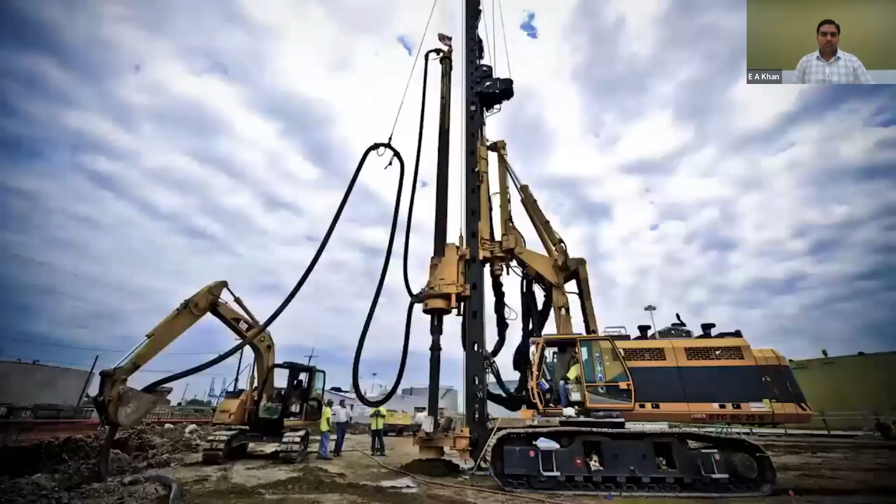Something about the soil—it was geotechnical. With the engineering, I felt like I could actually touch the soil. And then after I got into a lab and got to go out on drill rigs, it was so much based on experience and what you have seen and how that soil behaves. It's not going to be the same every single time, so there's always a challenge with it.

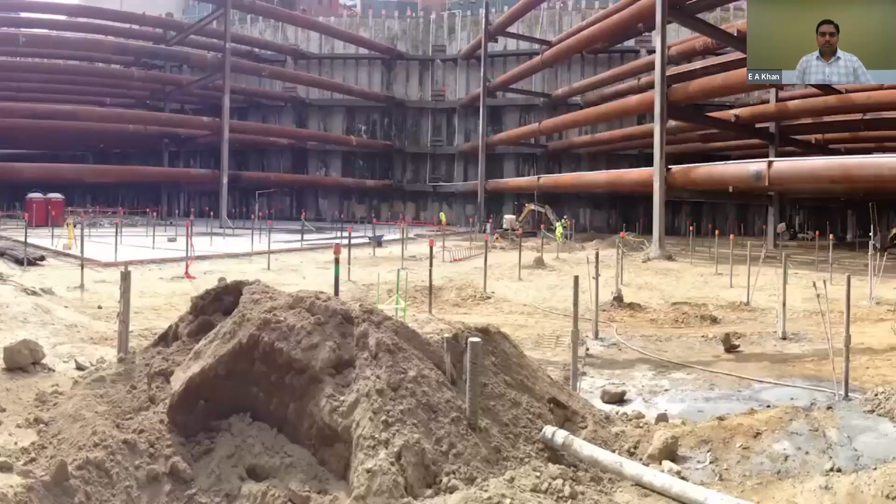It's a great industry for people who like new things that pop up underground and who can deal with changes as they happen. So it's rewarding and always full of new things.

We definitely get the opportunity to be designer and builder all in one, and not everybody has that offering. Not every engineer has that ability in the pathways that they choose.

It's very satisfying. Most of the work we do is never seen, but it's still satisfying to drive over a bridge knowing I've had a hand in constructing it, or looking at a high-rise building, any beautiful building, knowing that deep below the ground is my contribution to that structure. It's just a very satisfying feeling.

It's a very big industry, so you have a great opportunity to advance and move forward in your career and become valuable to the industry or the company you're working for.

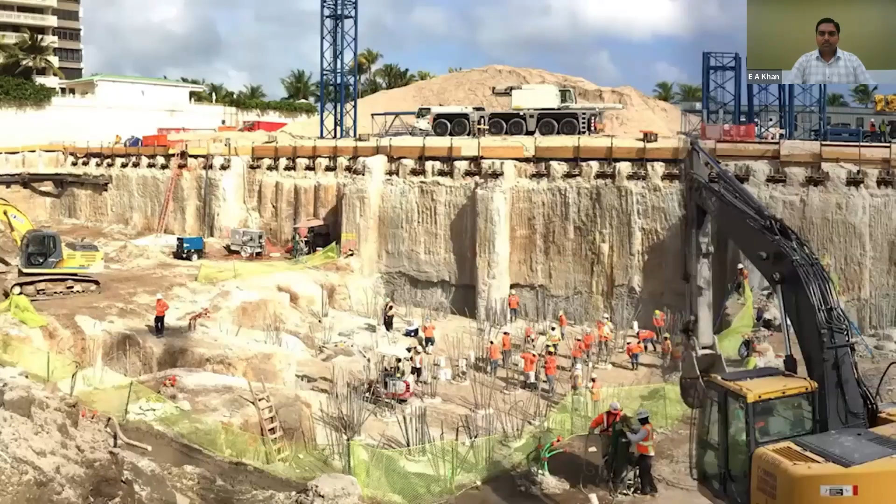What I like about soil is that it's sort of a mystery below the ground, right? You only get to see a little bit of it at a time and then try to interpret what's going on. So it's sort of a puzzle that you're putting together.

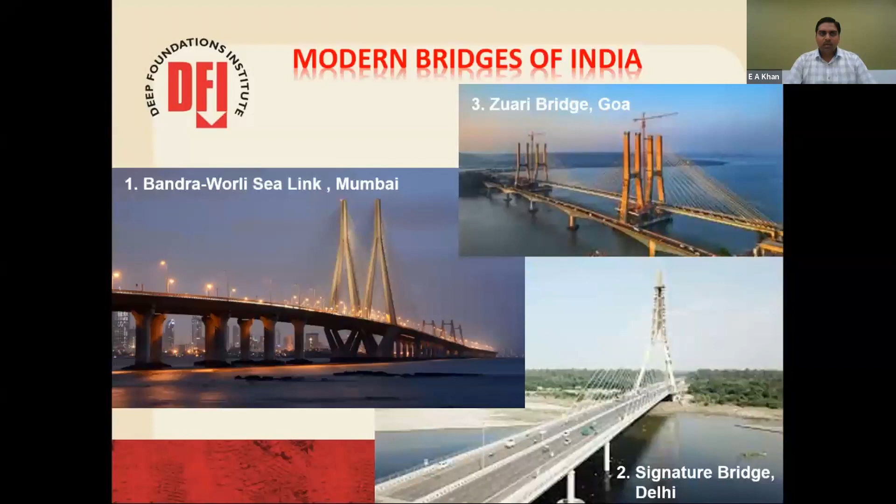What you are seeing on the screen are a few modern iconic bridges built in India in the last decade, be it the Bandra-Worli Sea Link in Mumbai, the Signature Bridge at Delhi, the Zuari Bridge at Goa, the Bogibeel Bridge at Assam, the third Narmada Bridge at Bharuch, and the second Hooghly Bridge at Vidyasagar Setu.

I'm sure you must be wondering how all these tall pylon, cable, and superstructures have been built. But have you ever thought about the structures hidden beneath, how they were built? And what if you are asked to construct one of such structures, what will be your strategy?

In this session, we'll try to understand how concepts are worked out to solve these kinds of real-time challenging problems with the help of two case studies: the Signature Bridge at Delhi, and the third Narmada Bridge at Bharuch.

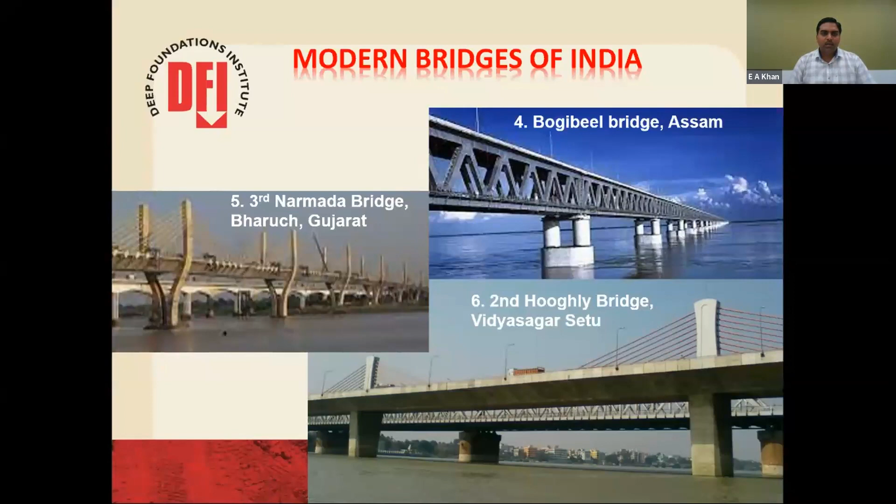So the case study will have a brief of what is the project, what is the substructure, the foundation, the superstructure, and what are the ground conditions. Then we'll try to understand how the site is spread out, what is the site layout, and what are the challenges there. We'll work out some options possible to solve that problem, and finally how that solution is applied at site, and what conclusion we can make out of it.

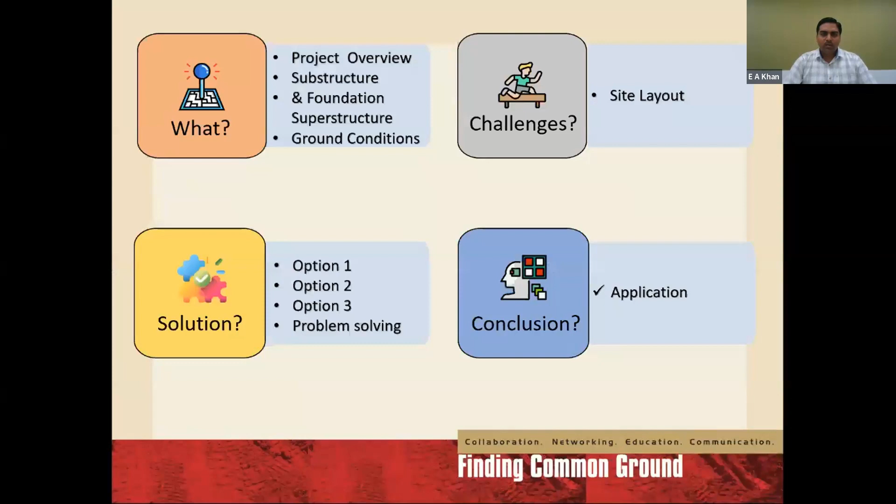There could be different possibilities of these foundations depending upon the contract conditions or environmental regulations. You need to maintain certain foundation levels, and there could be different possible situations.

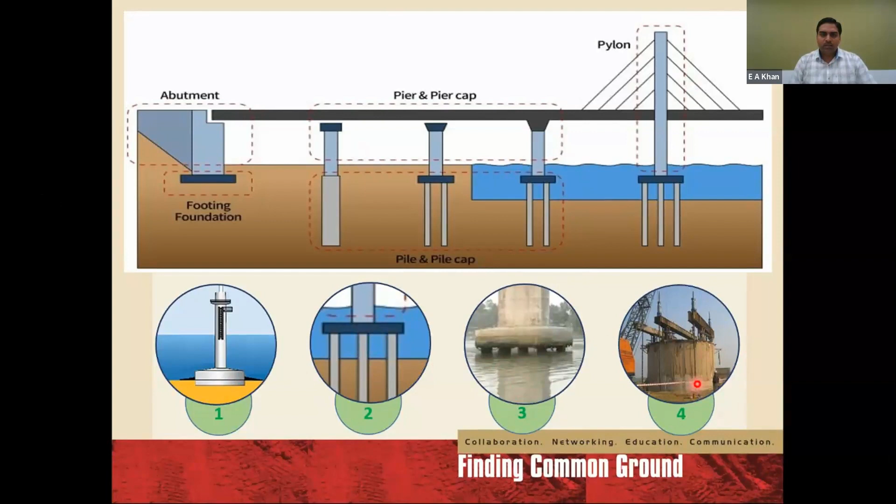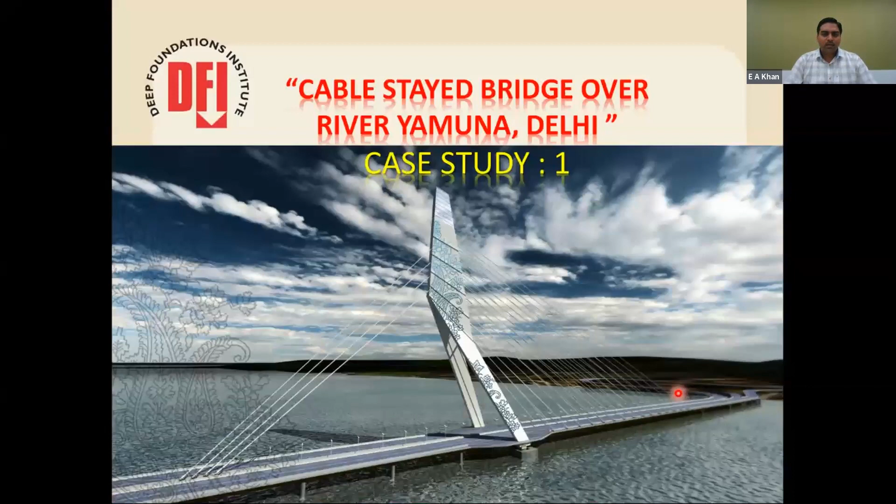Let us start with our first case, the cable stayed bridge over River Yamuna, the Signature Bridge, the iconic bridge most of you might be aware of. It is situated in Delhi, Wazirabad, 600 meters downstream of the existing barrage.

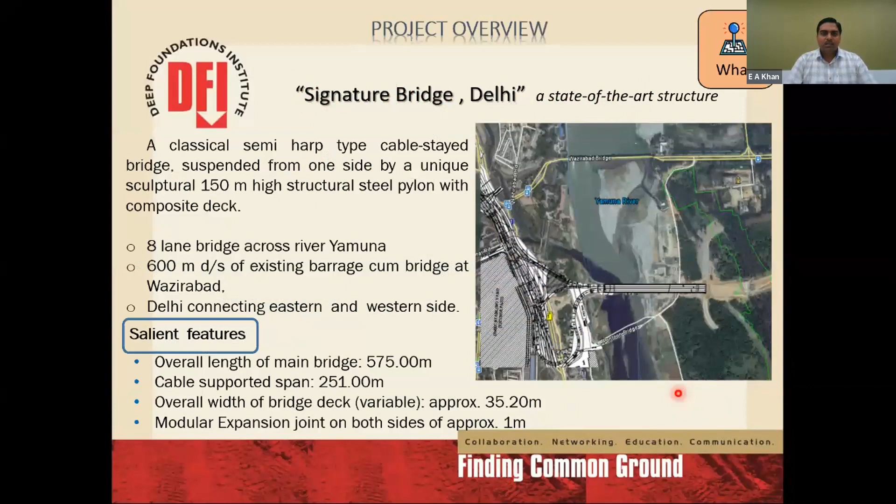The main bridge length is 575 meters, and the main cable stayed portion is 251 meters. The overall deck width is about 35.2 meters, and it has got one of the largest expansion joints, around 1 meter. The most state-of-the-art structure is the pylon, which is about 150 meters tall.

Let's see the superstructure. It consists of the deck, the riding surface, which has main girders and cross girders. It is held up by the cables, stay cables, supporting the main spans.

The load is taken up by the two legs of the pylon, in structural steel weighing around 7,500 metric tons. The entire load of this main span is balanced by the balancing backstay cables, which transfer the load further to the foundations, where we have a special rocker bearing allowing the movement of the bridge of that 1 meter I mentioned.

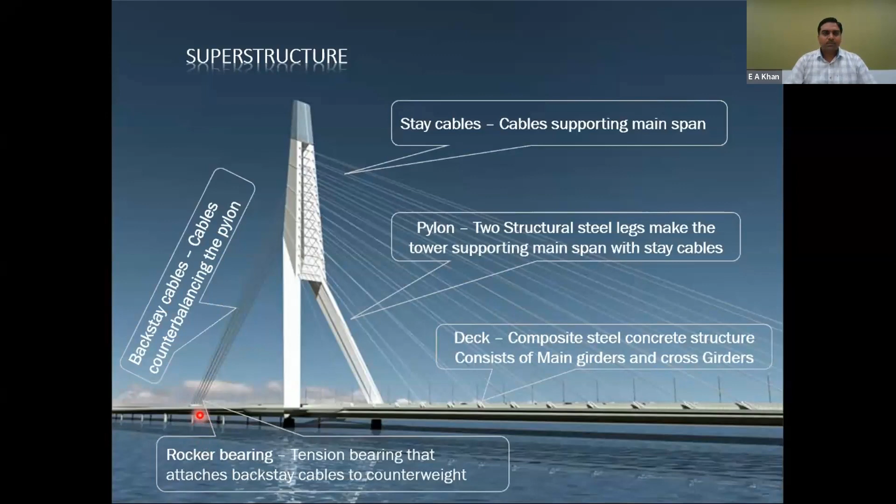Now, this project is a classic example of how every foundation in a project is unique. If you see the strata, from P1 to P26, the rock strata is varying - it goes up and then further goes down. So depending upon the loads which it has to carry, since this is the main span, the loads are heavy.

If you see from P1, there is a well foundation, then again an open raft. Then for the main pylon foundations, there are two separate foundations. And then again for the balancing spans, one raft foundation and then a well foundation.

And for the backstay, you have again a big, large diameter, 17-meter diameter well, which is a hybrid kind of foundation, which has got pile as well in it. The main P3, P19, and P20, these are the foundations which are critical, which are lying in the water.

Which are always subjected to floods. So the main pylon foundation is 23 meters in diameter, and it is about 20 meters resting on the rock below the soil. And the other adjoining balancing spans are P3 and P20 foundations, which are about 7 meters diameter and having a pier diameter of 2 meters.

And in the extreme left of the image, you can see some structure C32, which is the approaches. And you'll be surprised, beyond C32, there are pile foundations. So within a location of around 600 meters, you have all types of foundations. That is the challenge that civil engineers have to face.

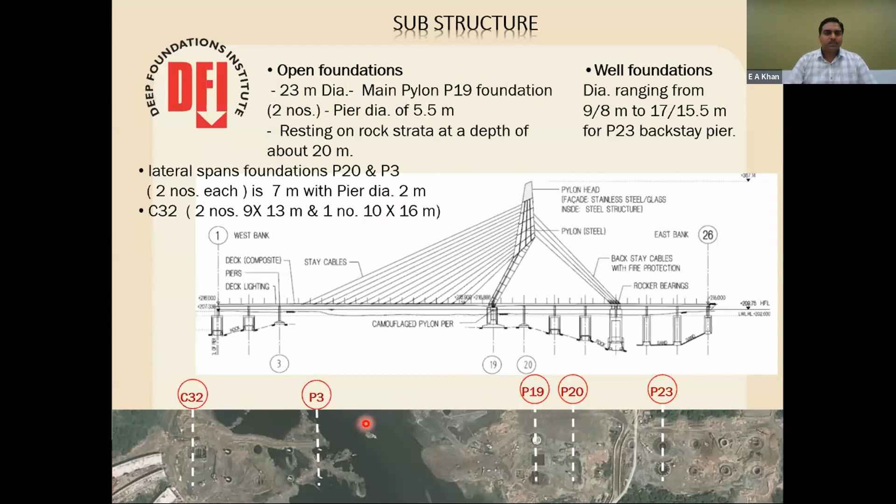Let us see the ground conditions. Here, mainly the subsoil strata is generally homogeneous and comprises of mainly two types of layers.

The low water level during summer season is around 202, and the high flood level is around 209, which is used in the permanent design. And then the observed ground level on the right-hand side from P19 to P26 is around 206, which is high ground, and P3 to P1 is around 203 meters.

The first layer is of sand, which is about up to 194 RL. And then you have sandy silt up to 190. And below that, you have a typical of a Delhi soil, which is a moderately strong quartzite rock.

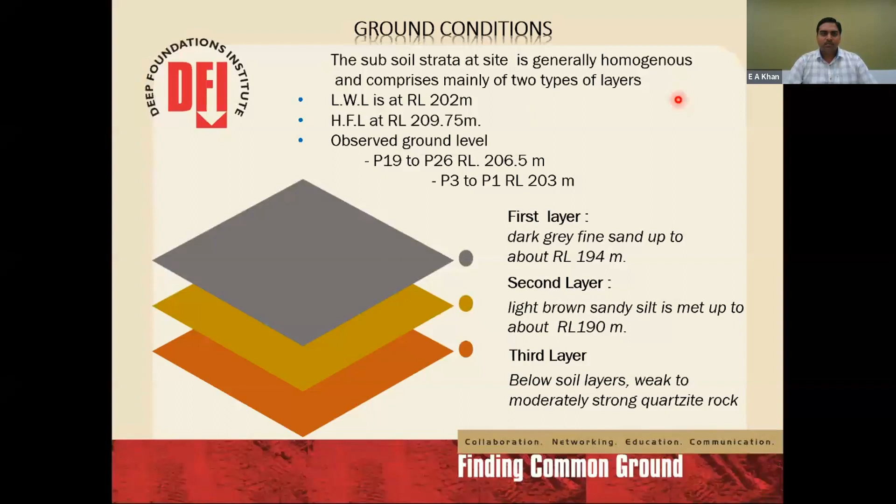So the challenge is to construct the foundations P19, 20, and P3, which are open raft to be founded on rock mid of the river. So we need an efficient ELS system.

There are certain requirements of every ELS system. In this particular case, it needs to be a simple and economical solution. It should facilitate a stable excavation with minimal obstruction to the foundations. It should provide an efficient groundwater cutoff. It should contain the ground movement within the permissible limits, and it should be easily dismantleable.

The real challenge is here, if you use any system, it has to rest on rock. So installation in hard rock is a challenge.

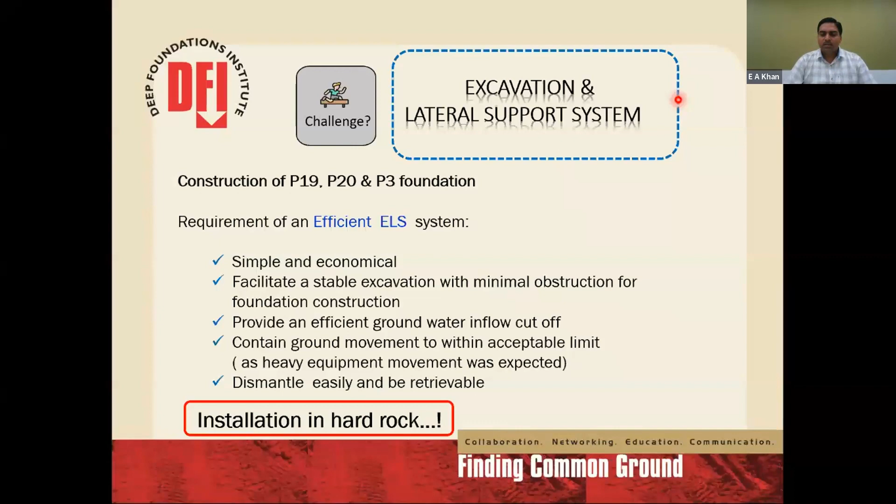What are the options possible? What are the solutions possible? The easiest solution is always to have an open excavation. This is the most economical way to build a permanent open foundation.

But there are certain limitations. If you see the area is very near to the edge of the river, so always there is a risk of flooding. And since the size of foundation is huge, it is around 23 meters in diameter. So if you excavate the entire area, it's a huge excavation.

And doing such excavation in an ecologically sensitive area is restricted. And when you do such excavation, a continuous dewatering and backfill expertise is required after the construction is complete.

And once you are doing open excavation, you need to stabilize the slope. So you may need a larger area. So that right of way also is an issue.

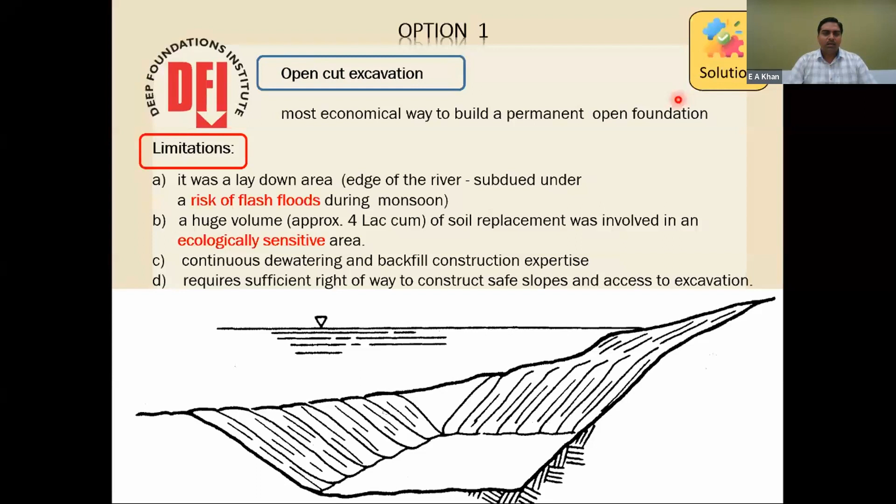So what is the other option possible? Maybe an excavation and lateral support system would be a better solution here. So cofferdam with sheet pile will have certain advantages, like it will allow excavation and construction of structure in otherwise very poor environment. It may provide a safe working environment.

And then if you are using sheet piles or any other similar structure, it may be easy to install and remove later on, so that the material can be reused in other projects.

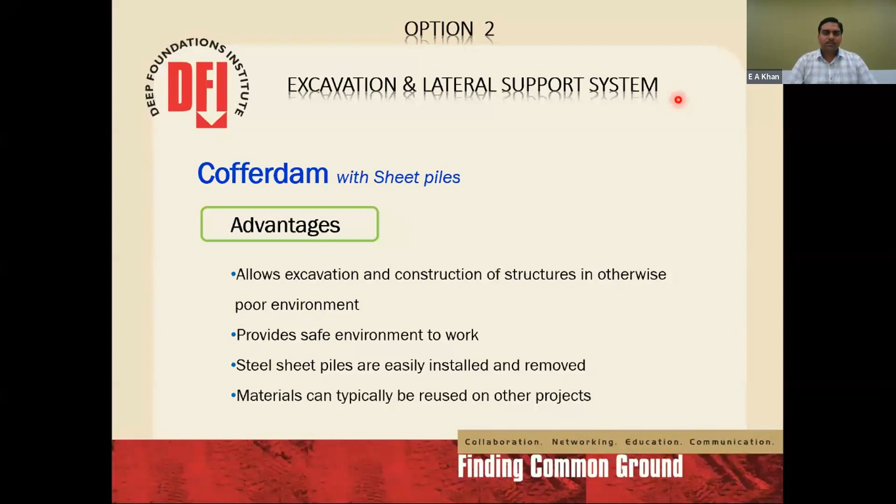Now, if we have decided that we'll use the structural steel sheet pile cofferdam, then there are always different sizes and shapes possible. So which is the best shape which we should adopt?

The first option is to have a rectangular cofferdam. So the issue with this is if you do a combined rectangular cofferdam of such a huge size, any problem anywhere in the structure will lead to stoppage of the work. Just imagine if it gets flooded, the entire operations will be stopped.

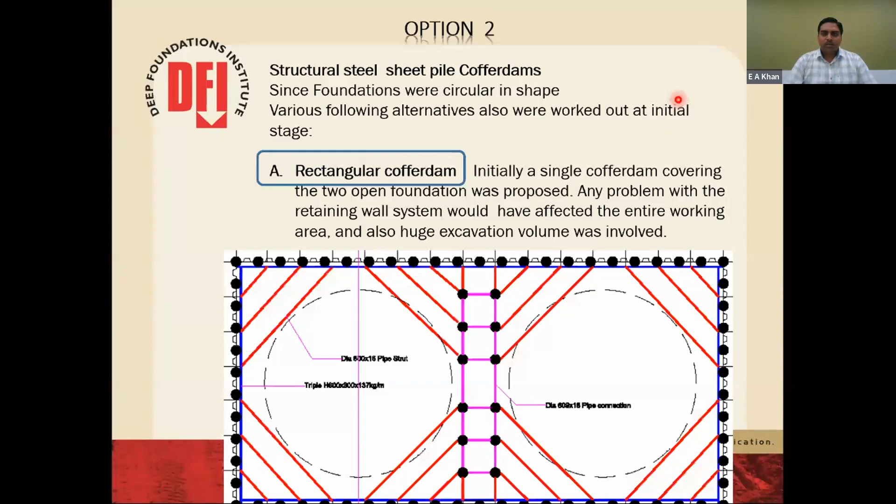Okay, so now the other options remain as octagonal cofferdam and circular cofferdam. Here in octagonal cofferdam, you get good structural optimization, where you'll get reduced quantities of sheet piles as well as reduced quantities of walers also. And the further better option is having a circular cofferdam.

But the radius required here is 12 meters, which is very challenging to achieve at site actually. You need a skilled team so that they can achieve perfect shape. Otherwise, the behavior which you have assumed in the analysis may not be the actual at site. So you may have problems later on. Although the circular cofferdam is the best economical solution in terms of quantities.

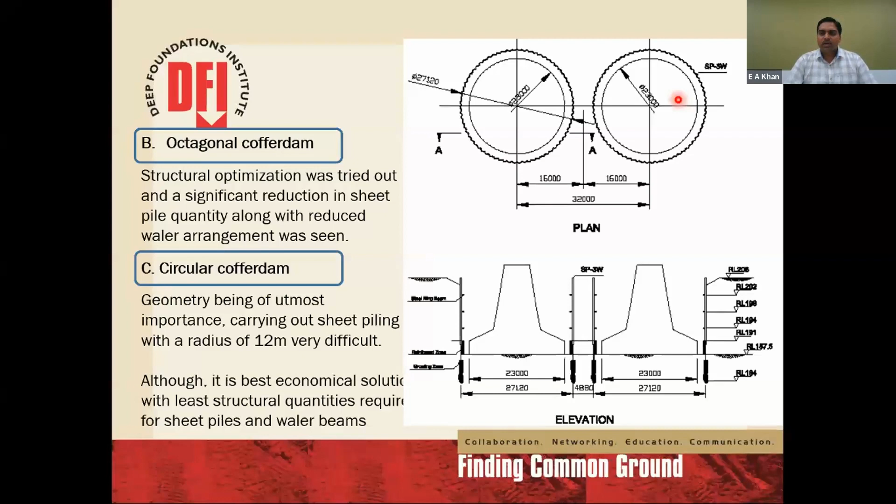So a techno-commercial review was done. And finally, it was decided that for P19 foundations, a 28 meter by 28 meter, 2 isolated open foundations will be done. And at P3 and P20, we'll have 12 meter size rectangular cofferdams.

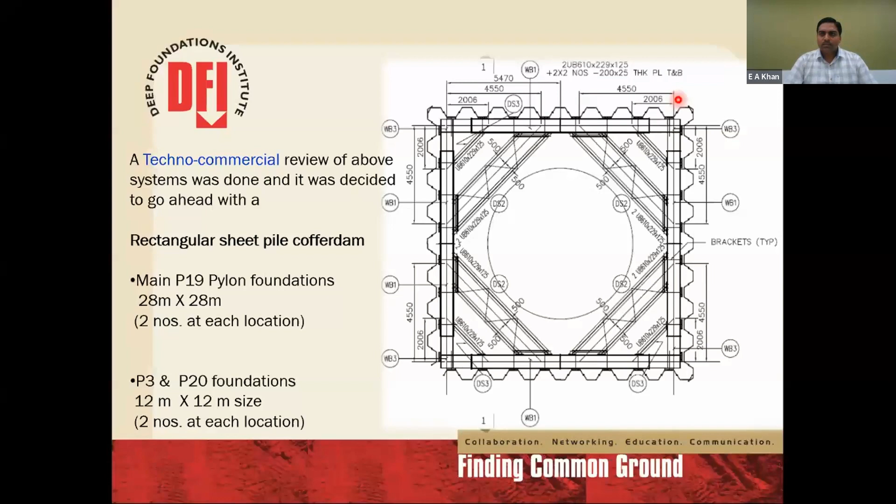Ideally, a sheet pile or any retention system should have good embedment in the soil or rock. But when dealing with rock, it is very difficult to penetrate the sheet pile. So insufficient embedment depth was a challenge here.

When you install the sheet pile and excavate layer by layer, strut by strut, by the time you reach the bottom to install the last strut level, there is a significant unsupported height. This creates a risk of base shear leading to instability, as there is no passive resistance available.

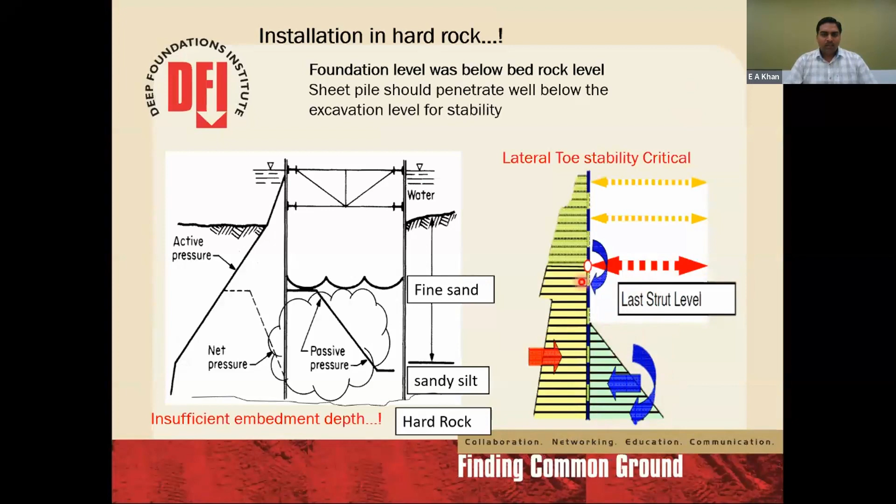We had to find a solution for this, which was the innovative idea of using a toe pin. A toe pin is a pre-drilled pile driven initially along with the sheet piles, on the face where reaction resistance needs to be generated. It's a 273 mm diameter steel casing drilled at the top, into which an ISMB 200 section, or any equivalent section sufficient to take the reaction, is lowered, and then concreting is done.

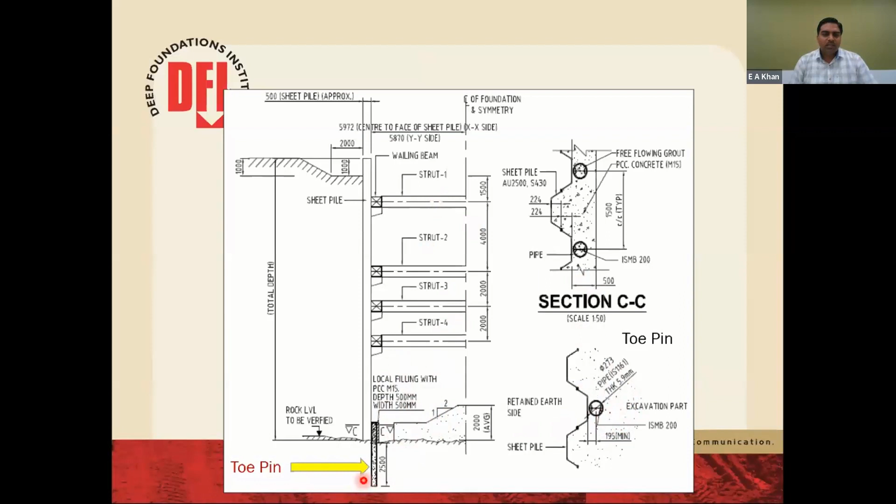So when you excavate layer by layer and reach this level, even though you need to excavate a greater depth, you have safe resistance available to carry out the works.

While designing such a cofferdam, certain considerations must be taken care of. A good understanding of the subsoil conditions is very important, as are the parameters used in the analysis. Otherwise you may not get the right picture, and may get forces which are not in line with actual observed forces.

Understanding the stage-wise excavation is again very important - what are the different steps, what forces will be generated, what are the unsupported conditions. All of this needs to be properly idealized.

Stability calculations against overturning must be done, and if there are chances of scouring, that must be taken care of. Especially when founding on rock, stability against horizontal shear at the tip is very important - you must check whether the system is stable and properly socketed in rock.

Besides active, earth, and passive pressures, there are other forces like ice, wave, and water current to consider. Equipment used for excavation moving around the structure may lead to additional surcharge due to heavy machinery, and heaving of material when the excavator works just beside the sheet pile or other retention system. This must all be taken care of.

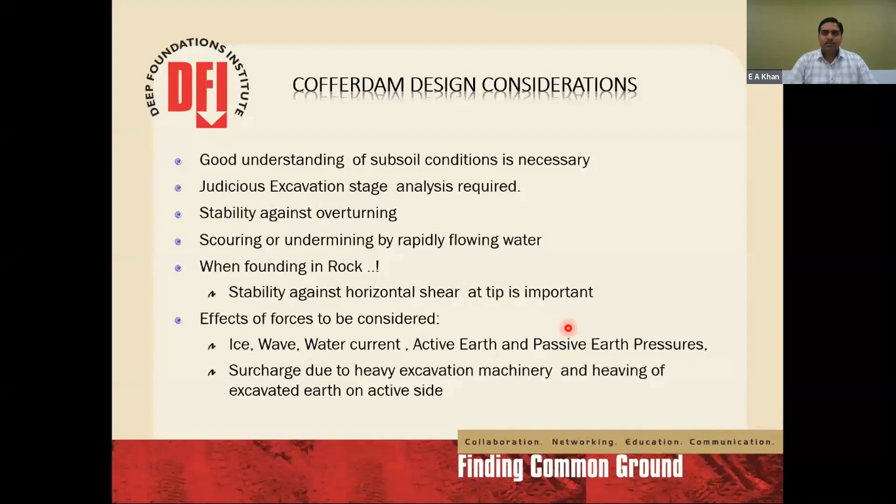Once you have designed, analyzed, and finalized the section, it is very important to communicate the construction stages and process to the construction team, so they carry out construction in the desired way and the behavior and performance of the system matches the design requirements. This is how you put the stages on the drawing board.

The first stage is clearing the area and leveling the ground. Then you drive the sheet piles, and pre-drill the toe pins before starting excavation.

Then you define the excavation level and fix the first strut level. Continuing similarly, you define further excavation levels, fix subsequent strut levels, and finally carry out construction of the required foundations.

Once the structure is complete, you need to retrieve all these elements, so you must define the retrieval scheme - at what height to backfill, and at what stage to dismantle the strut and waler system, step by step.

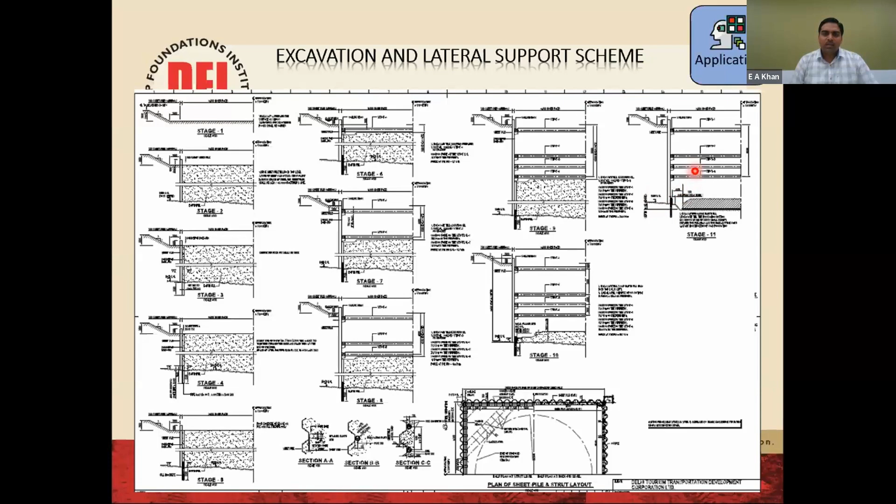Let us see how construction was carried out for this particular chosen scheme. The first step is to provide a guide frame - wherever you start, carry out the survey and provide the guide frame.

Then pre-drill the toe pin or liner, drilling it up to the required depth below the rock. The structural section, maybe ISMB 200 or as per design, is then lowered in, and concrete is done so that the additional layer required at the bottom can be avoided.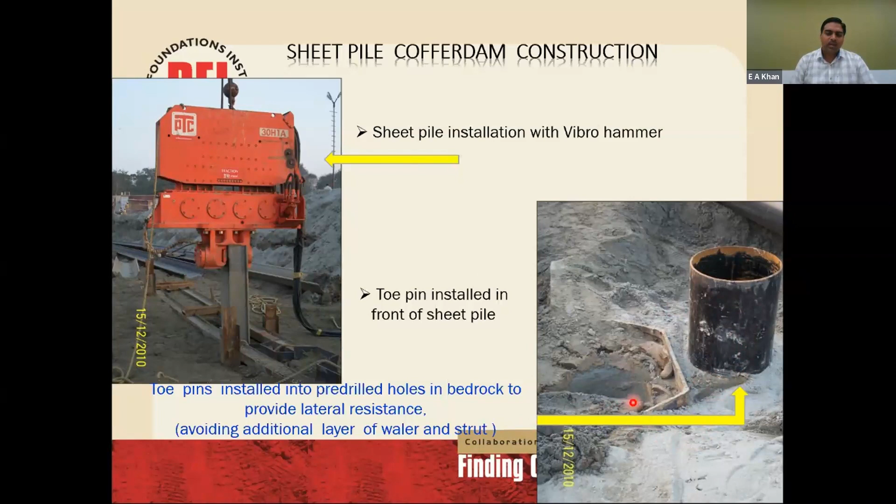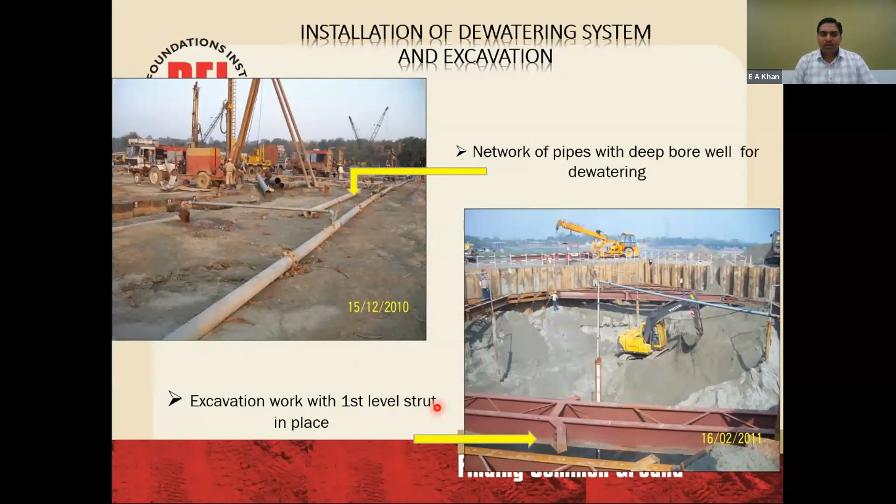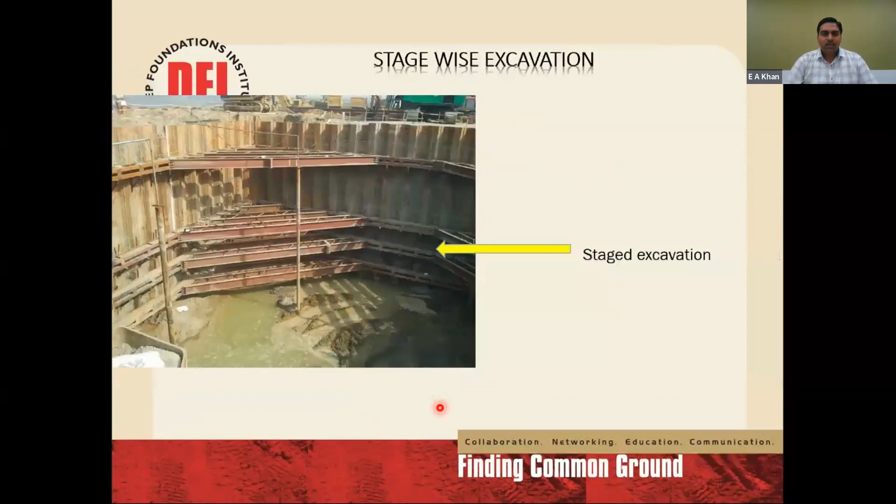Whenever you start excavation, before that, a network of drainage pipes needs to be installed, and boring needs to be carried out. The water table in the area should be lowered so that, if required, you can lower a suitable size excavator inside and excavate up to the required level, then fix the first strut level and continue further till the founding level is reached, keeping up dewatering of the area so that you have safe conditions around you.

Once the rock is reached, you may have to go further down to the required level for the structure. Here you can see the pre-drilled toe pins supporting the sheet pile, helping the structure to be built in a safe manner. This is how the P19 foundation, a raft of 23-meter diameter, was cast and completed.

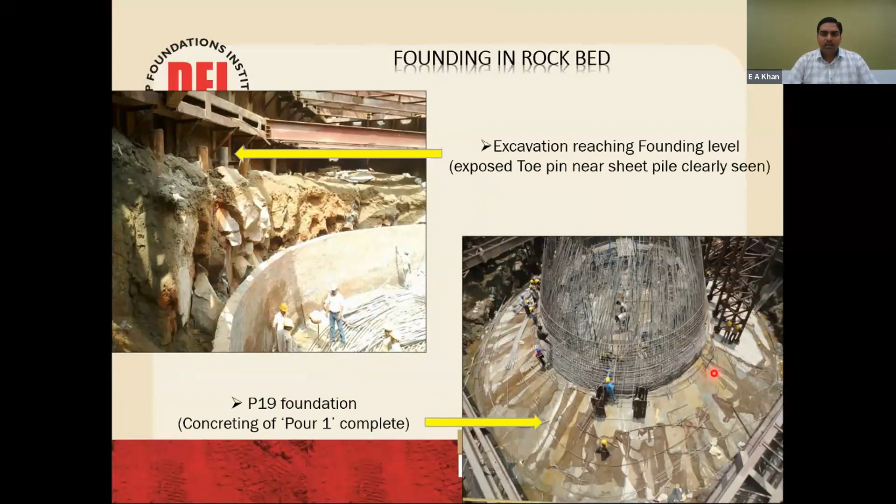Once the foundation is complete, the pier shaft is built. In this particular case, the pier shaft was 5.5 meter and the pier cap was 10 meter. From an aesthetic requirement, a dummy wall was created up to the bottom of the pier cap.

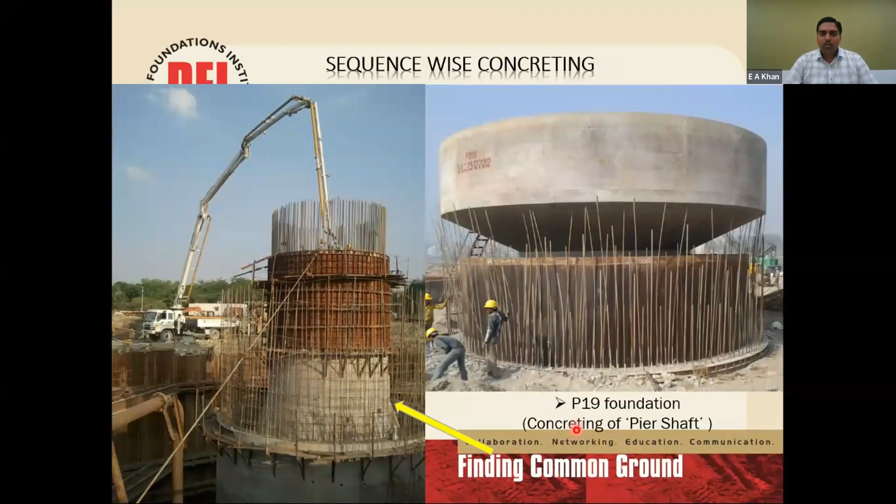Some important considerations to be taken care of while designing this system: special equipment is required to carry out these works. You may need a pile driving hammer, a vibro hammer, or an impact hammer, depending upon the soil conditions. You may need sufficient crane capacity. By rule of thumb, the crane boom length should be twice that of the sheet pile or the liner which you are going to use.

In case you are operating in waters, you may need barges. And guide frame is very important. Before you start the sheet piling driving work, you should have your guide frames and templates in place so that the alignment and profile are maintained.

These sheet piles are relatively expensive, so we must try to reuse them as much as possible within the project so that it becomes economically viable. It's a skill-based work, so meticulous planning is required to get productivity.

You need skilled labor. They should not rush into driving so that the interlocks of the sheet piles and liners, whichever you are providing, are maintained and do not come out, so that there is no leakage and plumb is maintained. You should always have a dewatering system in place so that flooding never occurs at your site.

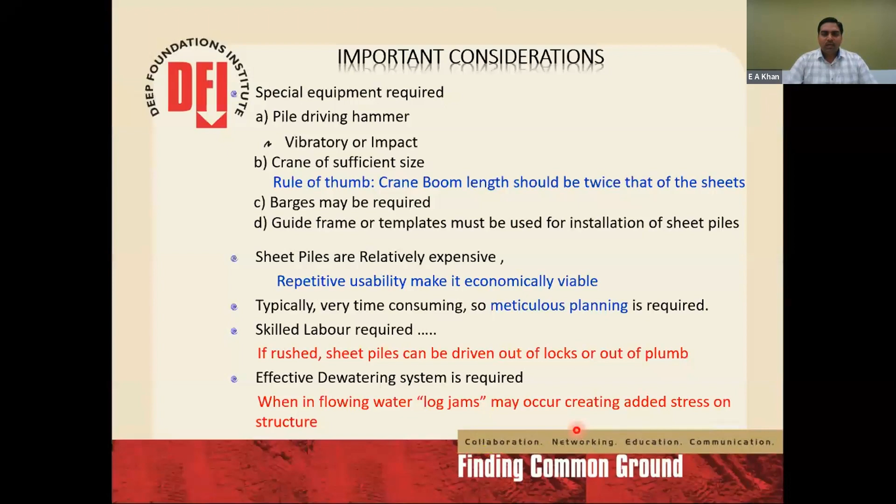Now from case study one, this particular bridge, we can make some conclusions. A good understanding of the site geotechnical profile is a must during modeling and analysis of any ELS system. We must have the parameters from lab tests to get the behavior in the right fashion.

In this particular project, an innovative concept of pre-drilled toe pinning was successfully incorporated in the design and construction to minimize cost and provide stable support to the sheet pile cofferdam. This technique has given a new level of confidence in the use of toe pinning for sheet piles, especially in rock, so that we can avoid ground anchors as well. This technique may prove to be the best solution for carrying out huge excavation works in rock in the future.

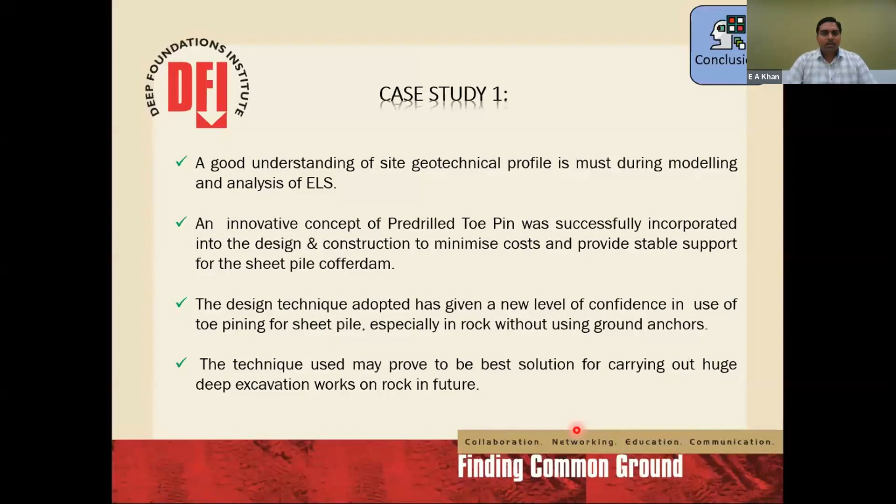Let us quickly now see our second project, which is the extradosed cable stayed bridge over river Narmada, Gujarat, at Bharuch, which is near Vadodara.

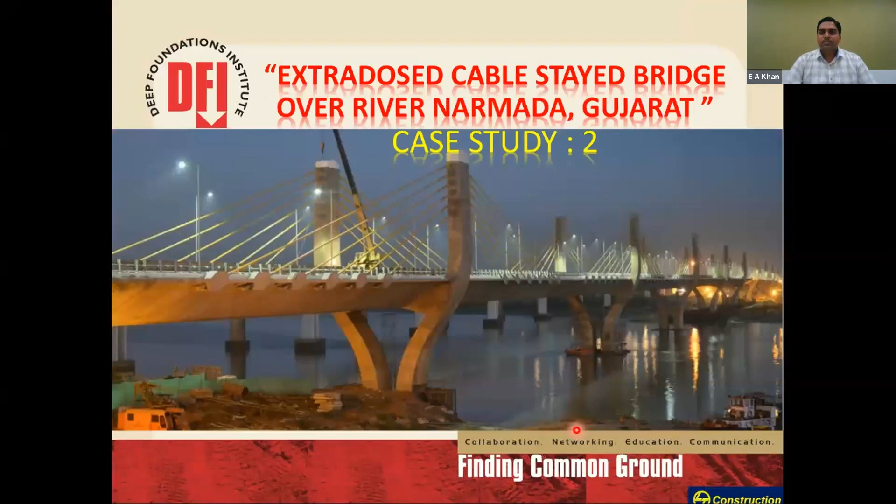Let us understand what the project is. You can see here three parallel bridges. The far off bridge is the first Narmada bridge, built in 1977, also called Sardar Bridge. The second bridge is built 29 meters downstream of the first bridge, built in 1999. The third Narmada bridge, around 100 meters downstream of the second bridge, was built in 2017. It is an extradosed bridge.

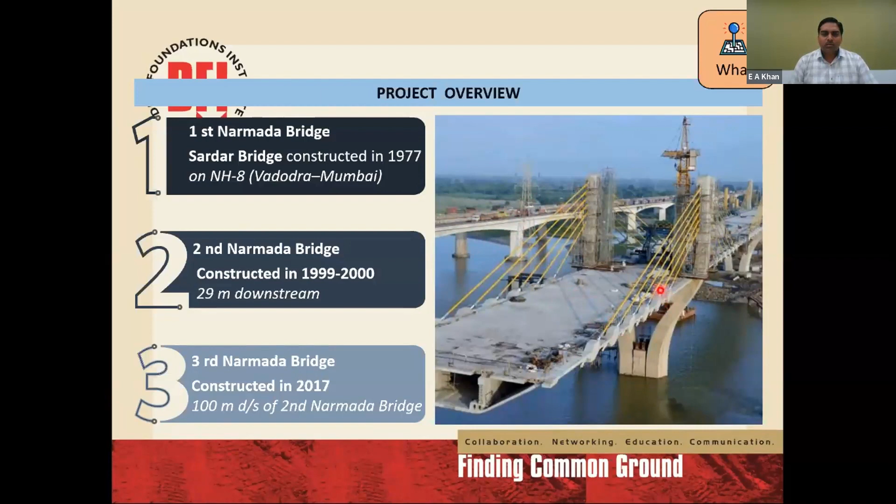Talking about the substructure and foundations, the entire bridge has 1.5 meter diameter piles totaling around 132 numbers, with an average depth of around 50 meters. The pile cap is 13.2 by 15.5 by 2.2 meters in size, and it lies below water.

The lower pylon is Y-shaped with a height of around 30 meters maximum. The two lower pylons are connected with a diaphragm of M50 grade. The upper structure is called the upper pylon. The deck is 20.8 meters wide, with maximum segment weight of 130 tons, precast segmental box girder.

The spans total up to 1344 meters, which is around 1.3 kilometers, with two balancing spans of 96 meters and 8 spans of 144 meters.

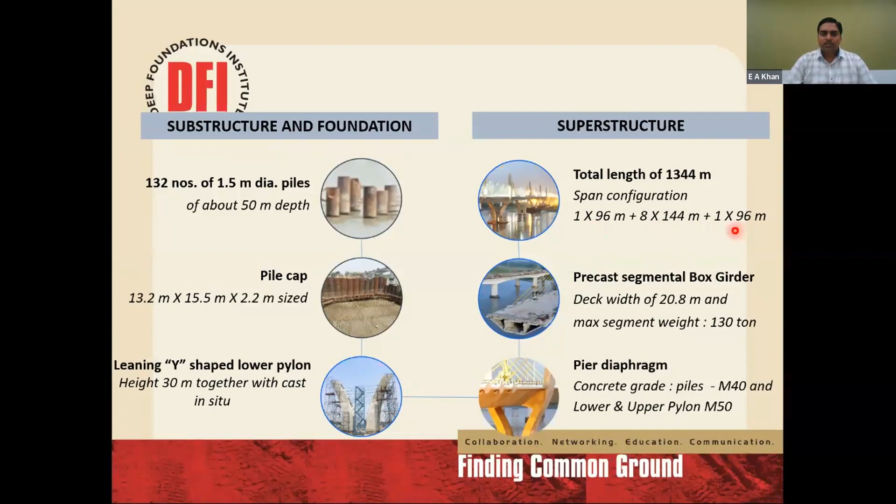Let us see the ground conditions here. The topmost layer is silty sand, around 4 to 5 meters, which is very weak, with an SPT value of only 5 to 11.

Then you have the second layer, which is 30 to 34 meters, with SPT value ranging from 35 to 96, so it is a harder clay. There is difficulty found while driving the sheet piles, even piles.

Then you have the third layer where the SPT value is more than 100 and there is refusal. The bottommost layer is sandy silt with hard clay, and the groundwater level is usually at 2.8.

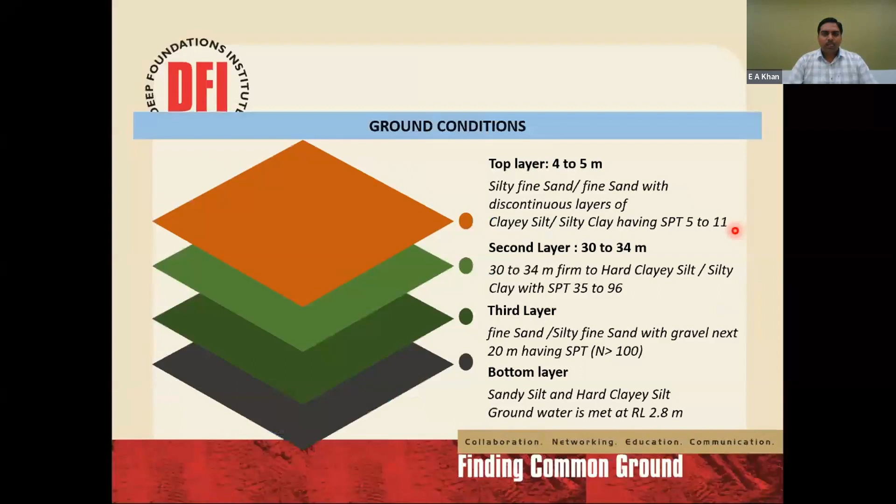Let us see how the site is spread out. The farthest structure is bridge number 1, then bridge number 2, and 100 meters downstream is bridge number 3. It has mainly 4 critical foundations which pose a real challenge for construction.

P1, P2, P3 are in the mid-river, and P4 is at the edge of the river. So there is always a possibility to manage these foundations by carrying out some island protection works. But these 3 foundations in the mid-river are subjected to daily tidal variations.

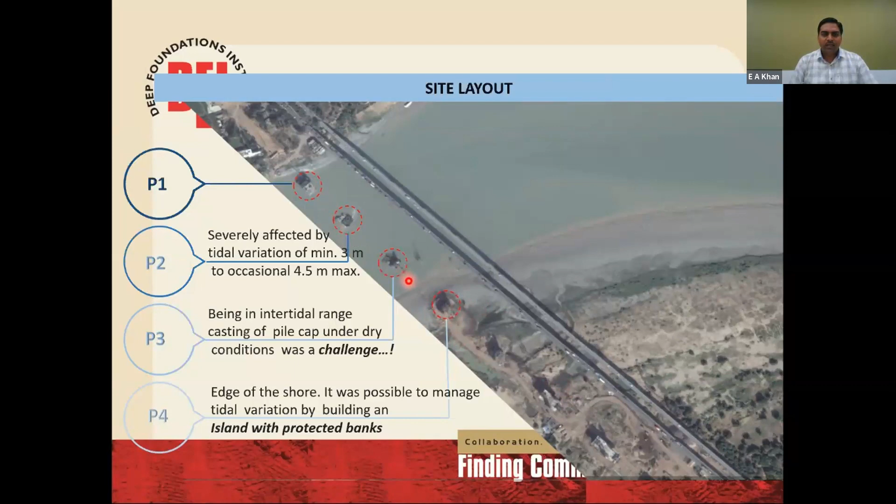As Bharuch is near the sea, there is a daily tidal effect of low tides and high tides, with a variation of around 3 to 4.5 meters maximum. So the challenge is to construct foundations P1, P2, P3 safely with a suitable ELS system.

Here the requirements are different. It has to be simple and economical. It needs to facilitate a stable system for water retention with minimal obstruction to foundation construction. It should contain the high daily tidal pressures and should be easily dismantleable. The biggest problem is it has to sustain deep waters and retain a good depth of water.

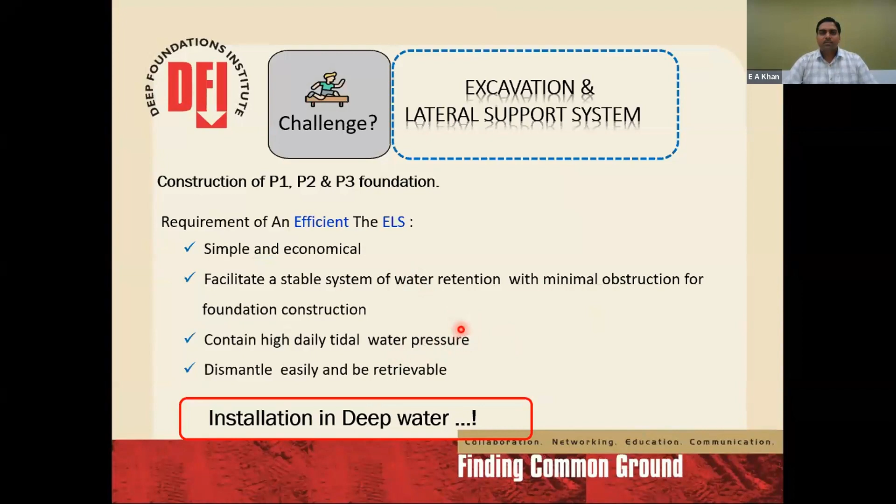So what options are possible here? Similar to our last problem, the first option could be open excavation, where you simply excavate. Since foundation P4 was at the edge of the river, it was possible to carry out this excavation there. But at other locations, there is always a risk of flooding. A continuous dewatering system is required for open excavation, and you need sufficient right of way. So only P4 was the location where we could adopt this kind of solution.

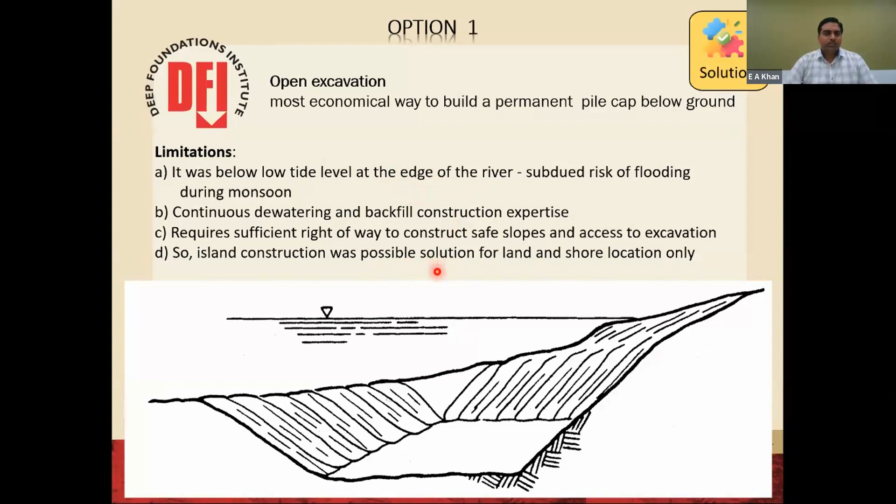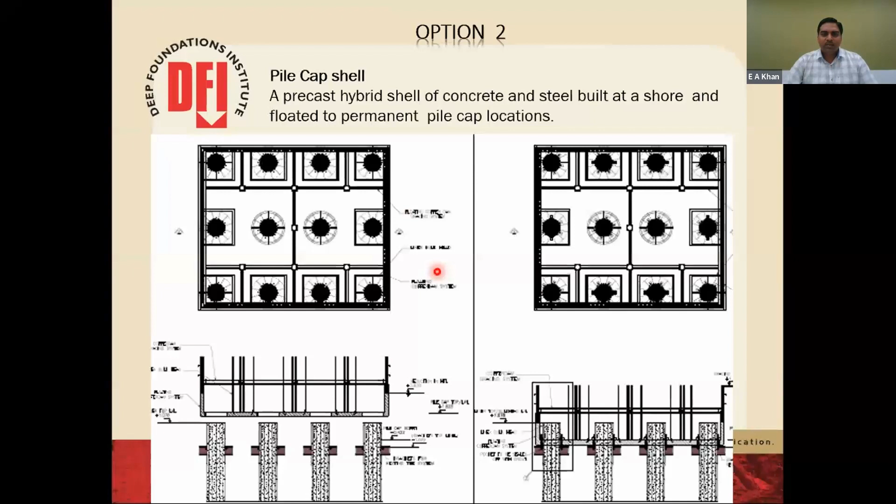But it was found that commercially this solution was not viable for only 3 foundations, as there were many other foundations, so carrying it out was not economical. The most economical way was to build a cofferdam with 2 different sections: one with circular liners of 1.5 diameter and another with U-type, J-type sheet piles welded face to face.

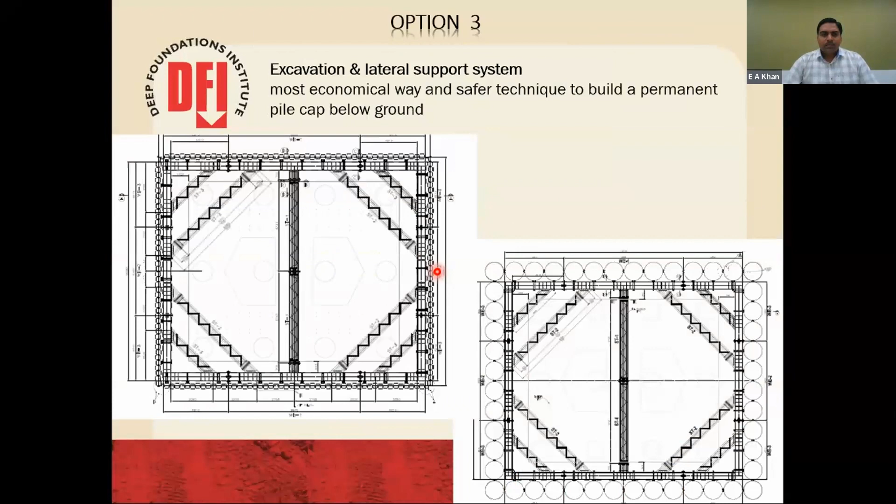As I said earlier, construction stage analysis plays a very important role in designing such structures, where you have to understand each and every level of construction. In this particular case, once the sheet pile or any other retention system is completed, you need to dewater it.

You need to place the first level of strut, then further dewater it up to the required level, then place the second level and carry out similar stage-by-stage fixing of reinforcement and strut-wale arrangement, dewatering up to the required depth.

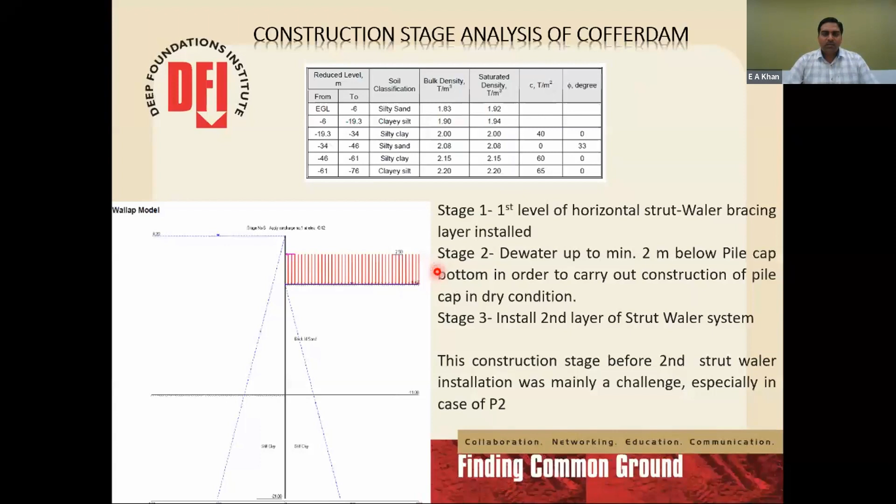But here the challenge was dewatering below the second level of strut, which was really difficult because of the high water head. The pile cap was lying at the mid-level between high tide and low tide. To ensure sufficient dry conditions for dewatering, you will have a water head, a pressure head here.

This pressure head created a huge bending moment. In case of P2, where the retention was more than 15 meters, it was not possible to fit in any suitable ELS system here. So a simple idea came to our mind, wherein it was thought why don't we backfill this entire area to permanently cater to the differential head. So locally available soil was filled in, and we were able to reduce the bending moments up to 35% in case of P2.

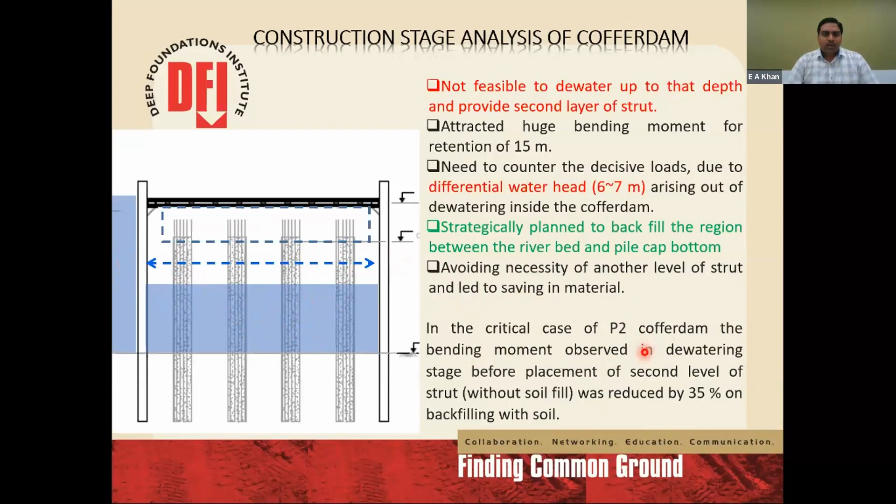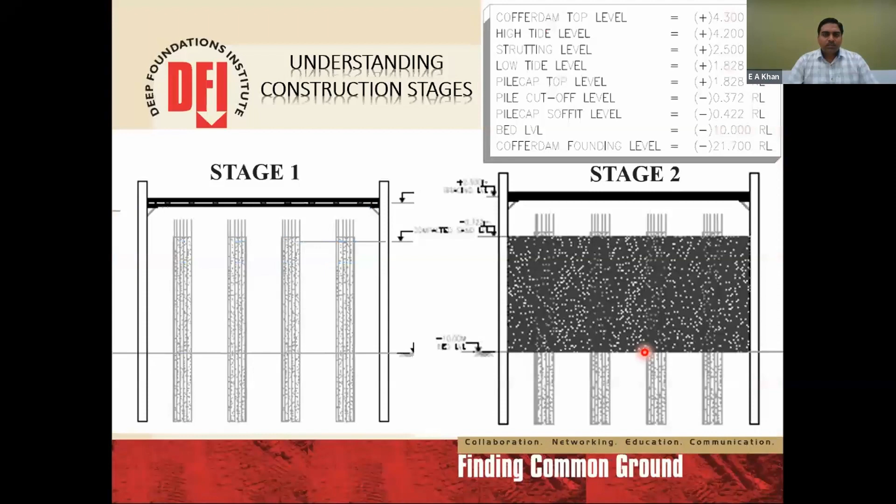Let us see how the stage-wise schemes were defined. The first stage, dewatering is done. First level of strut is fixed. Then backfilling is carried out up to the pile cap bottom. And then if any leakage is there, dewatering is carried out, and then PCC is done, over which the pile cap is cast.

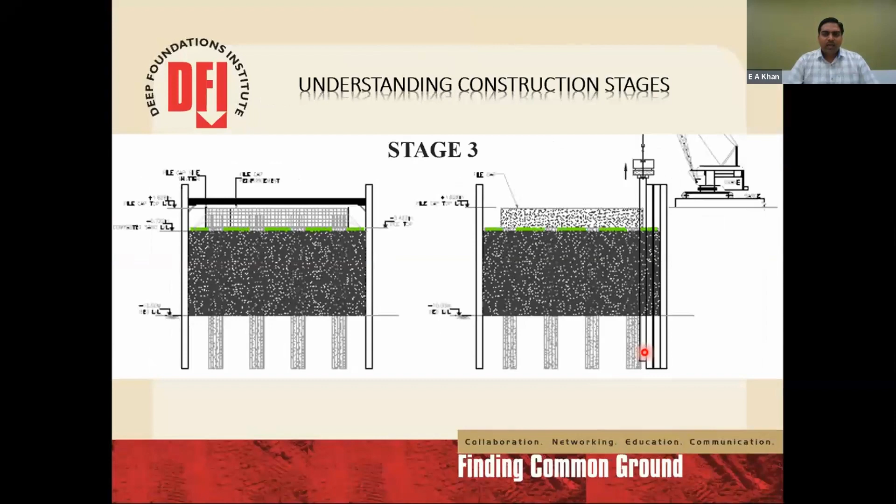From the analysis, we get the forces and suitable strut and wale system can be designed.

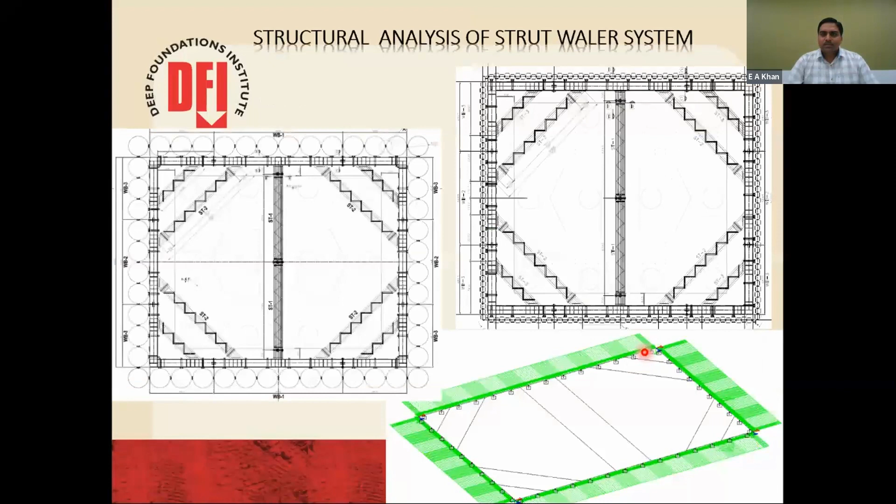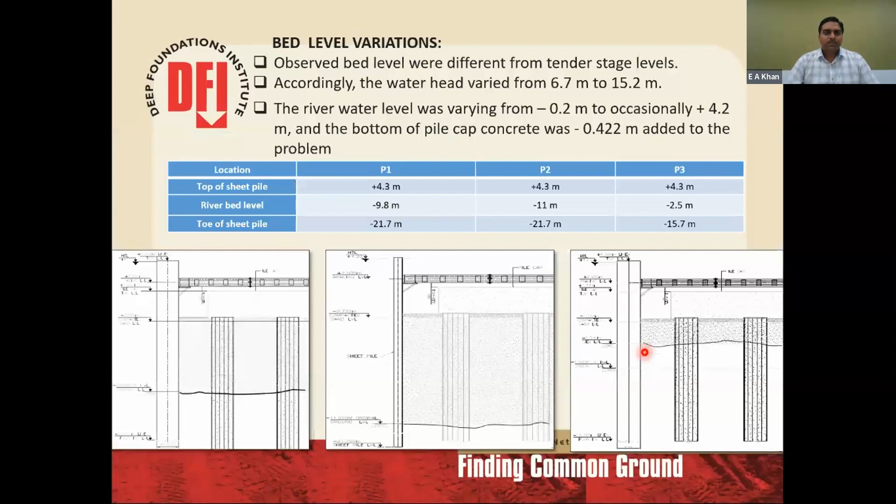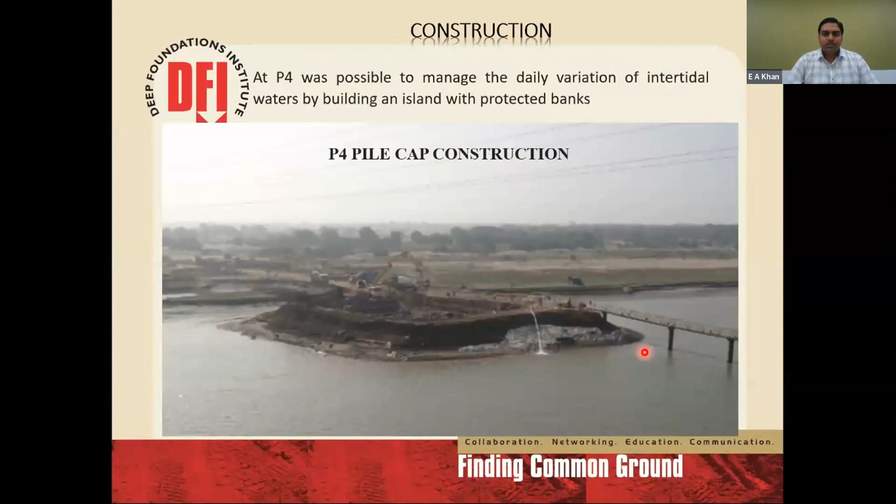Now let us see the construction. As discussed earlier, P4 was at the shore, and it was possible to carry out construction by making a bund, dewatering, securing the embankments, dewatering to the required levels, creating dry conditions, and carrying out the pile cap construction.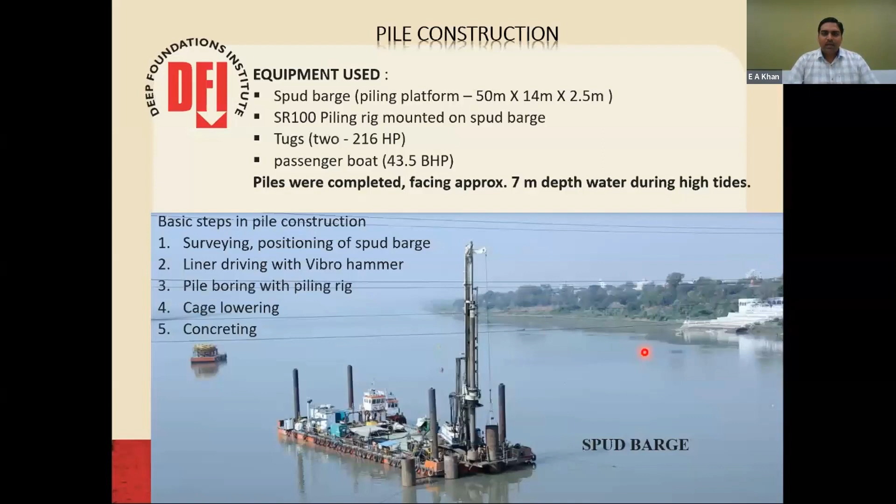Once the pile cap construction is to be started, all the permanent piles must be ready, and before that, you have to start the cofferdam. The very first step of cofferdam construction is carrying out the survey, positioning the guide piles, positioning the guide frame, ensuring their alignment, and then driving the sheet piles using a suitable vibro hammer, continuously checking the pile verticality.

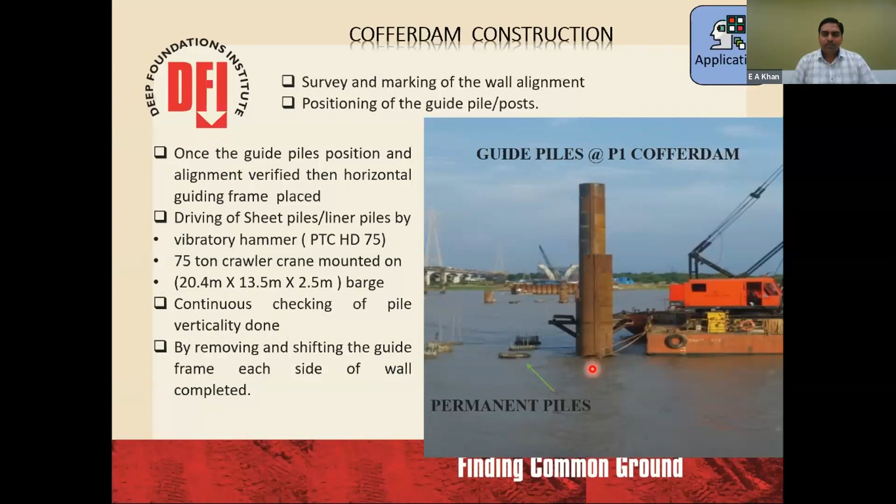And once one stretch of wall is done, you can always move ahead by moving the guide frame. We need to define the steps. It is important to note that at the beginning, you should always leave some space to start with, so that once you complete all the directions, you are able to adjust your errors while closing the cofferdam.

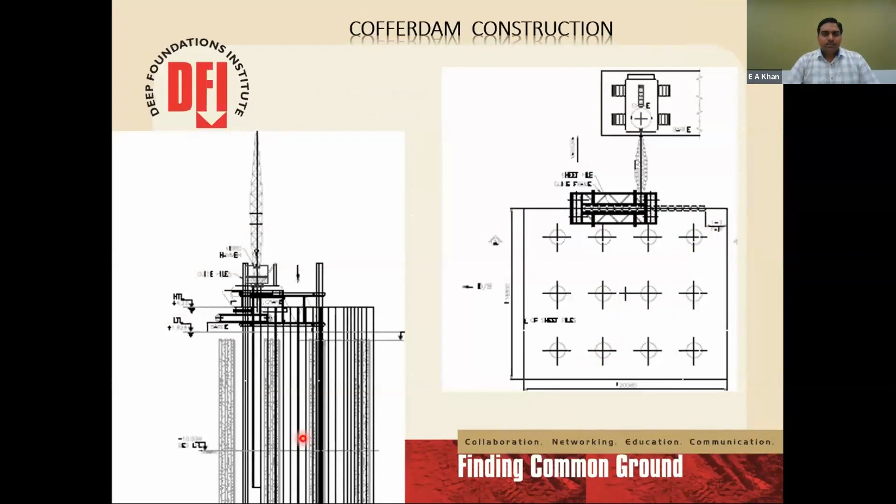At the corners, you can use the corner sections which are readily available. In this particular case, two sections were used: one type of sheet pile was face-to-face welded hat type, and the other was a 1.5 meter diameter liner. They had specially made end connections to make the corner bend.

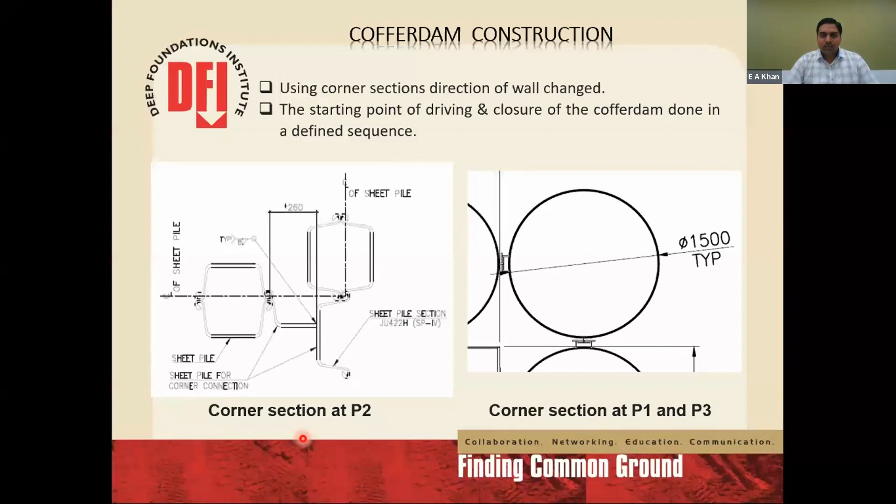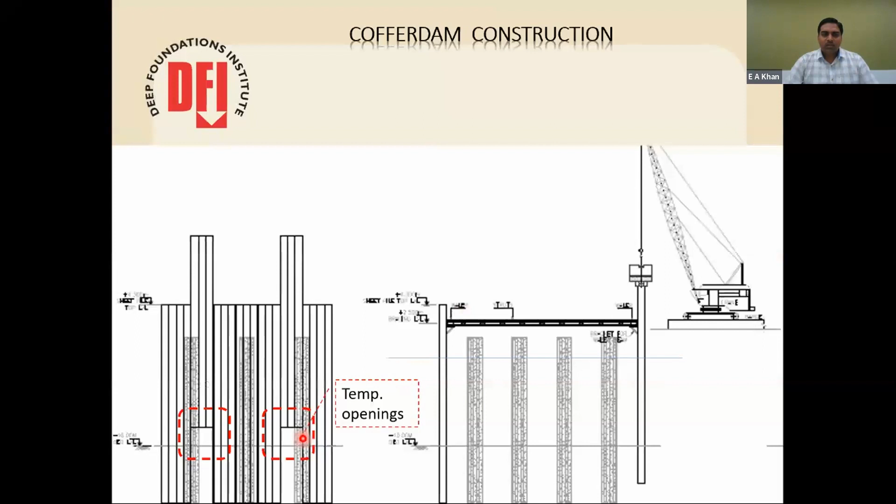One of the important steps here is that you need to keep gates so as to ensure that till the completion of the cofferdam, the inside and outside water levels are the same, and you don't experience that differential head before completion of the cofferdam. So temporary openings were kept, liners were raised, and water was allowed to move in and out till the entire work was complete. Here you can see some of the piles were raised up, and water was allowed to move in and out.

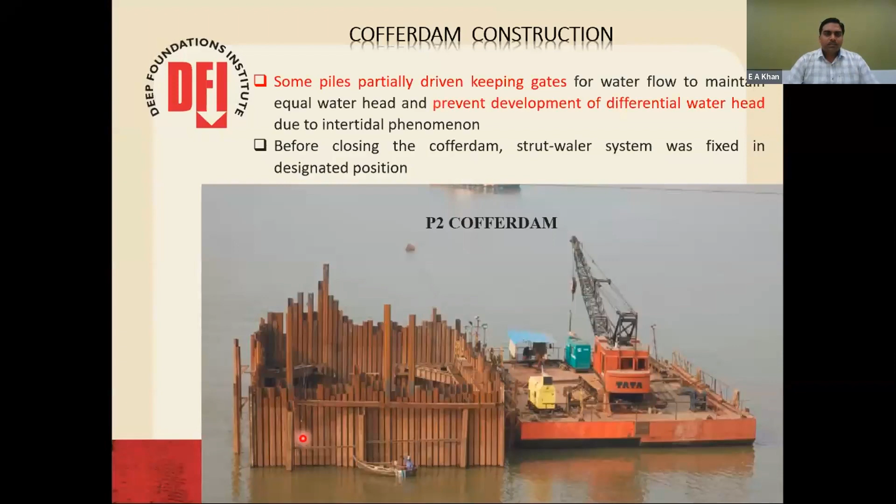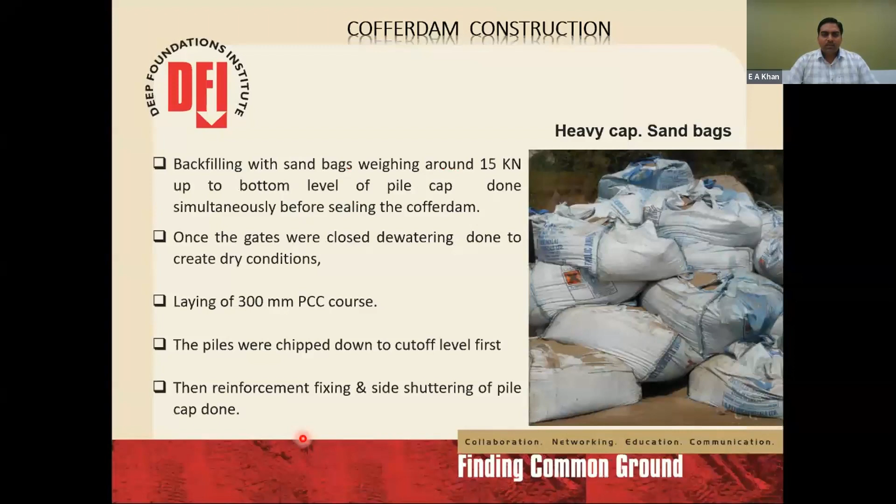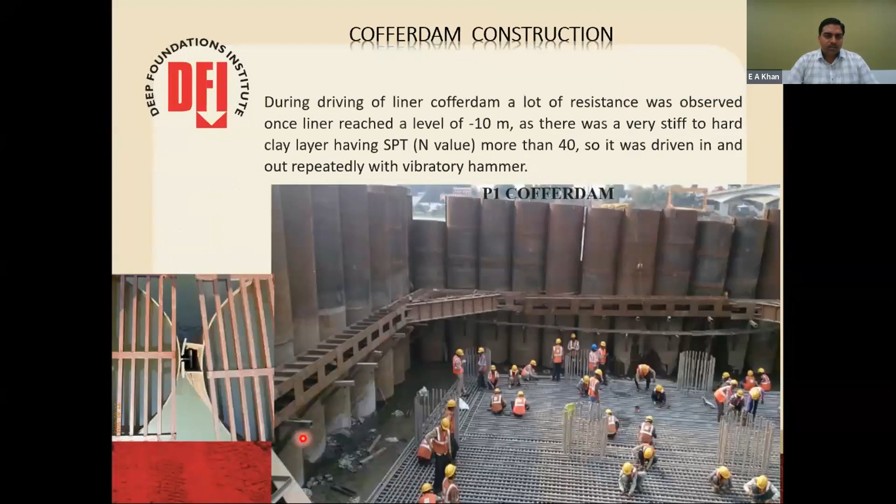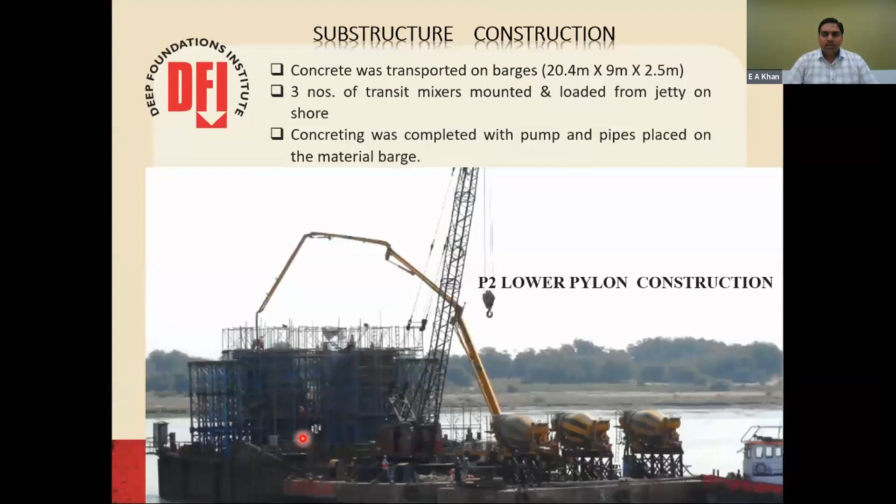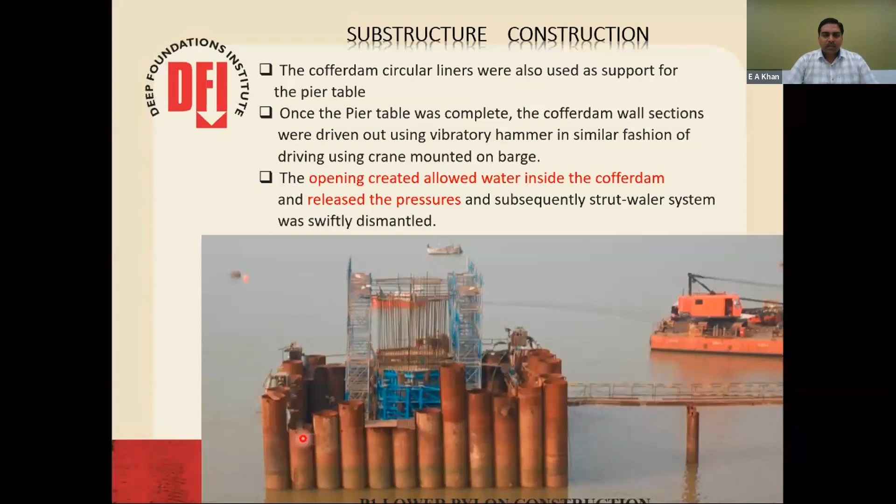Once the work is complete, you again have to define the retrieval methodology the same way. The liners are driven, gates are opened, water is allowed to move in and out, levels are maintained, and only then is the strut waler system removed.

With this particular case, we can conclude that the retention system for the project was designed based on the geotechnical and groundwater control requirements. It was evident that overall reliability of the structural performance in such cases is very sensitive to soil stiffness parameters. Apart from localized problems of leakage, no significant deflection was observed.

A very smart and simple use of local material led to economy in the project and ease in construction. It is foreseen that the recent expansion in the use of sheet piles and circular steel walls in this country, along with the use of local resources, will increase appreciation of the potential of this technique.

So with these two cases, let me quickly summarize. In the first case, we saw how we can establish a cofferdam system in rock also, using an innovative idea of a toe pin, and depending upon the site condition, we can decide which is the best method.

In case 2, the situation was different and water depth retention was the main criteria. We used our local resources and were able to contain the structural requirement of the quantity to a very good extent, finding an effective, cost-effective solution.

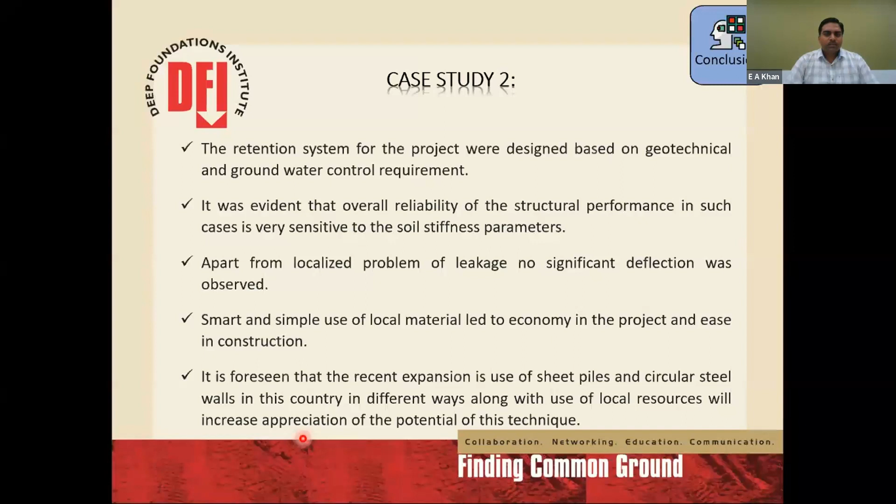This is all. We can have questions now, if any.

Thank you, Mr. Khan. I have come across a few questions during the presentation which I want to put in front of you. Mr. C. Anabalgan is asking: is this toe pin in the sheet pile system to avoid water ingress?

The toe pin is provided to give that base resistance, which is not available due to insufficient embedment of the sheet piles.

Second question, from Mr. Mohan Mishri: how much horizontal deflection of sheet piles was permitted at the top of the sheet piles? See, the sheet piles are similar to our piles, and the requirements of deflection remain the same as per IRC requirements.

Next question from Mohan Mishri: were integrity tests and load tests carried out for the piles? These are not load-bearing piles basically; sheet piles are retention systems, and the critical thing is lateral loads. So no such test is usually done here, unless in the case of liners, where vertical load is also intended, in which case you may carry it out.